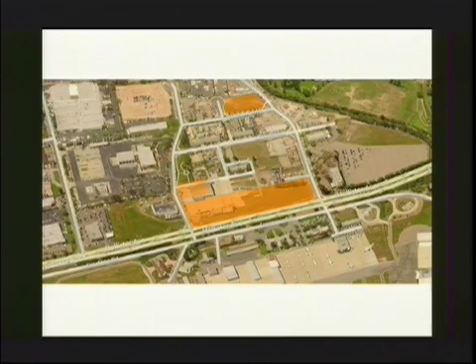We'll be showing both of these plans shortly, so we're going to start with parcel 22 down here. This is a site plan. Again, to reorient everyone, down below is Hollister Avenue, Love Place, Lopez Road, and this is the new proposed road, Wallace Becknell Road.

The study we're going to show you today is kind of the general balancing act between how do you develop a parcel where there are a couple of driving forces. One is how much can you build, how many buildings can there be—that's kind of a product of what support those buildings need in terms of parking, and in terms of water retention and water filtration, which is a serious issue. I think you'll see as we unveil this design that we've taken that issue very seriously and actually incorporated it to be really part of a feature of the design.

I just quickly wanted to call out some of the details of the project. We have a total of 21 units, two types of units. We have retail, light industrial, and we're totaling roughly under 50,000 square feet total. Retail is located on the left and the right side, and in between here is light industrial.

There are 4 key points we wanted to point out about the site plan. The first thing is that a majority of the parking is along Wallace Becknell Road, and this is mostly because of the airport guidelines, which say that parking has to be screened—we're just letting the buildings naturally screen that.

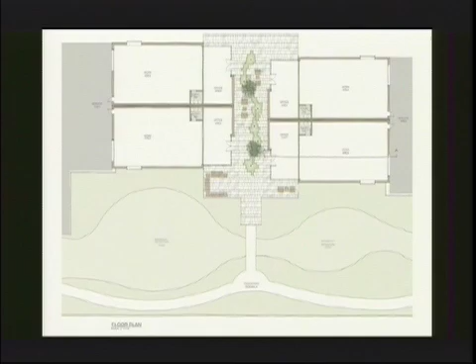This separation allows us to do a couple of different things in terms of how you organize all of the traffic that has to flow through the site. We also have the benefit of really querying people in the real estate community to decide what the matrix of spaces really should be, how big a space would a user want.

So we kind of came upon this 2,500 square foot module that started to work in terms of who our client base might be. But we also think that this is kind of a new development. I think the kind of tenancy that we'll attract will be a kind of higher techie type of tenant that might want to be in this space. And all of those users really want a certain sense of identity.

So to that end, this is our wedge-shaped buildings where we're doing all of this kind of water collection into a whole series of downspout gutters that will have drainage chains that come down into this kind of central area. So we've really kind of taken this idea of how water gets treated and made it a kind of feature of the building. So they not only serve their industrial purpose, but they serve a very environmental purpose as well.

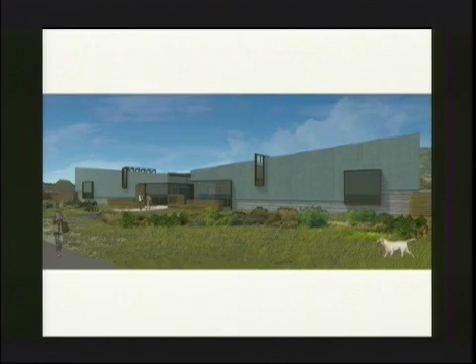And we think that on the Hollister Avenue face, this retention basin can be landscaped in a way that really makes these buildings face the community in a way that they'll be a very inviting and pleasant thing for people to come and enjoy. Not only work in, but enjoy.

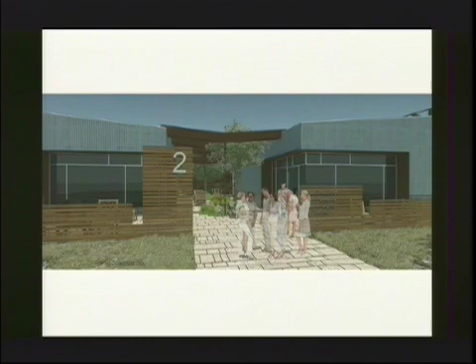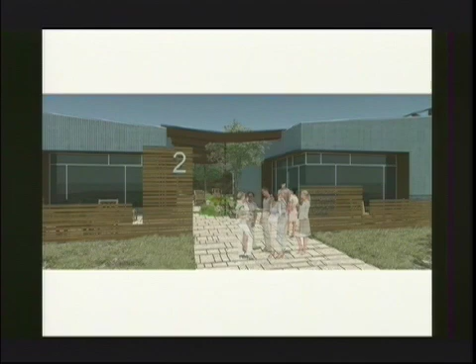So our courtyard, paseo courtyards, really give us the entrances to the low-end side of the buildings, which is really where the office components of those spaces might be. You can enter into the areas where offices would be located, and the passageway to come through gives the site some real transparency from one side to the other, and also makes for a very pleasant way for people to come in and out of the new buildings.

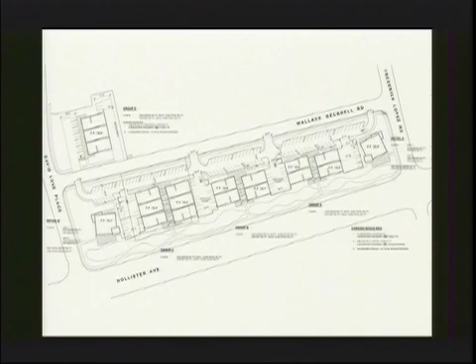They're also bookended. So although we have industrial uses here, there really is a visual importance to the corner points. So they're being bookended with a different type of unit that could potentially support some retail or commercial activity.

They really are the same building. We've done a little bit of carving away at the same kind of module that's being developed for the others. And that's kind of to reorient the corners back towards the intersection so that they have a little bit more importance visually as you drive up and down Hollister Avenue.

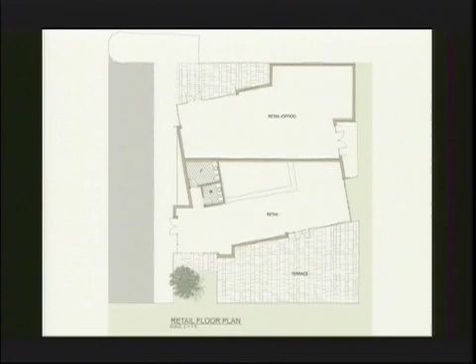So the retail components would just twist themselves away from the general buildings that would line the rest of the project. And,

But we also think that this activity is very worthwhile, especially in the campus community of buildings that are being developed here and the type of userships that kind of surround this entire property. So we think there's good justification for doing this. And it's a nice family of buildings as they relate one to another.

I just would point out, too, that in the specific plan, both those corners were set and identified for modest retail, not substantial retail by any means, but minor retail, service delivery type things. And it could either, if it doesn't go retail, it can certainly be commercial, industrial.

And all of the buildings are designed to either be 2,500 square foot units or linked together so that they can accommodate larger tenancies, should that be the case. And we like this. There's always a day and nighttime aspect to all buildings.

But we think that, along with direct relief, this campus of buildings could actually be a very pleasant addition to the family of buildings on Hollister Avenue. And I think that some of this issue of having these kind of transparent corridors that connect the Hollister Avenue side to the Wallace Avenue, Becknell, Wallace Becknell side, really make for a very pleasant way to organize this industrial campus.

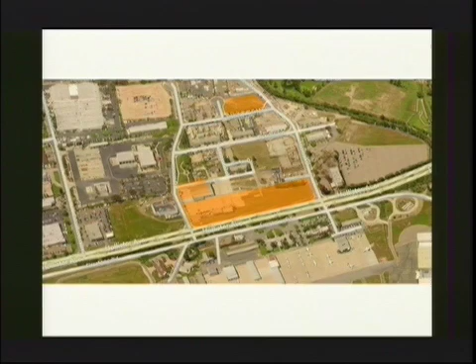And we're also doing a project linking in with this, using the kind of similar vocabulary for parcel 17, where there's already a kind of 6,000 square foot building program. We're kind of using the same elements, with the required amount of parking and a service courtyard, so there can be other kind of sales activities.

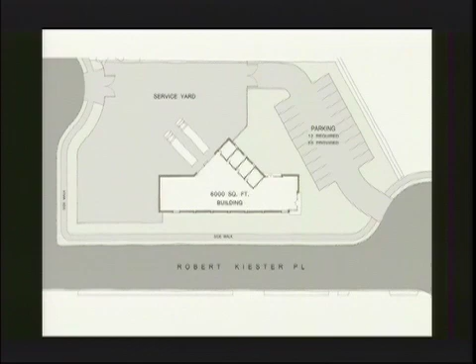There's been a variety of different user types that we've thought of, but ostensibly it's for storage and for truck access from one side and public access from the other. And we think that we'll probably be using the same kit of parts that we've established for parcel 22, so that there's an economy to the things that we're doing. We're really trying to replicate a kind of very simple kit of parts and make sure that if we keep repeating them over and over again, there's an economy of scale to the things that we're up to.

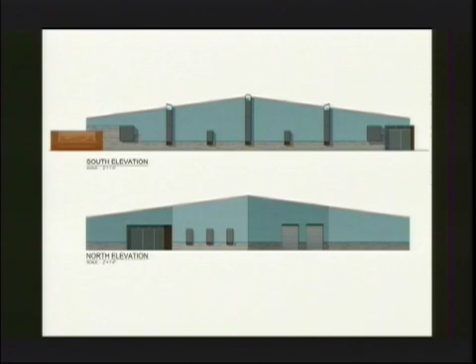I'd like to introduce Derek Eichelberger from Arcadia Studios, who's our landscape architect, who has taken control of our green space. Do we have the plan that has any of the photos on it?

Yeah, I have a couple of photos. You want me to go there? No, not just yet. I just want to make sure I have 2 pages. Yeah, please.

Hello, my name is Derek Eichelberger with Arcadia Studio, and we are doing the landscape on this project. It's fun to be involved in a project like this when from the very start all of the consultants are rowing in the same direction.

Bob and Jamie came up with what I thought was a really innovative, simple design that fits very simply on a very natural landscape. I thought it's very different than a lot of the landscapes you've seen in Goleta, and so I took my cues from that. They actually did the drawing you saw with a pastoral landscape, quasi-stream in front of the project, before I was even involved.

When I saw that, it harkened me back to a project I just finished not too long ago at UCSB, the Ocean Sciences Building, which was all about water retention and percolation on site. The landscape itself was designed to be exclusively Channel Islands plant materials, so it's all native.

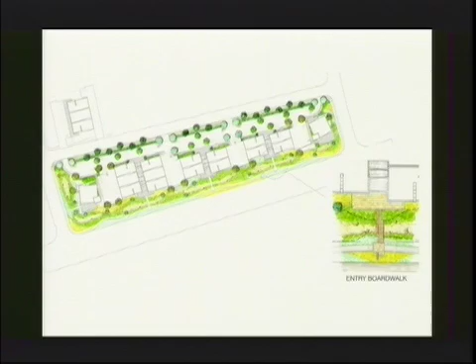We felt pretty lucky to piggyback on the UCSB project, because Derek's already done so much research on creating a native garden. These are all water tolerant species indigenous to Santa Barbara. It seemed like a no-brainer to intensify that sense of Santa Barbara in a water retention basin. We've done everything we can to take an ecological gesture and turn it into a real part of the architecture and the site. We're excited about this being a good neighbor on Hollister Avenue.

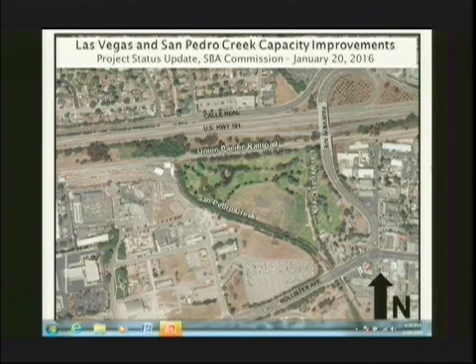So this is an overview. Let's see here, going down to the next slide. I presume it's a page down thing—no, here. Arrow. Okay, what did you do? That's okay. Use the tab. It's okay, we just got a preview. All right. Tab. Oh, this? Okay. Thank goodness for technical people—I'd never get through these otherwise.

Okay, so an overview of the project. Let me start by pointing out the picture in the upper left-hand corner—that's from 1998, I believe, which is when the gears started churning for the ideas of this project. Here we are in 2016, 18 years later, nearing completion. The project objective is to reduce flooding, mostly on the upstream side of Calle Real. There are residential neighborhoods and some commercial areas, and the highway itself, which historically suffered inundation often.

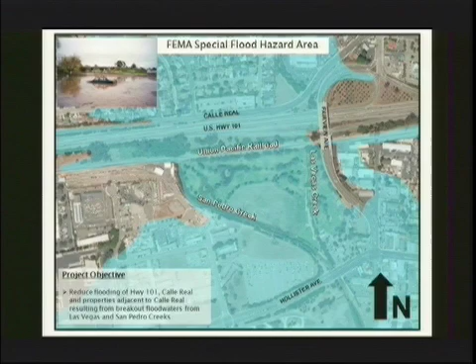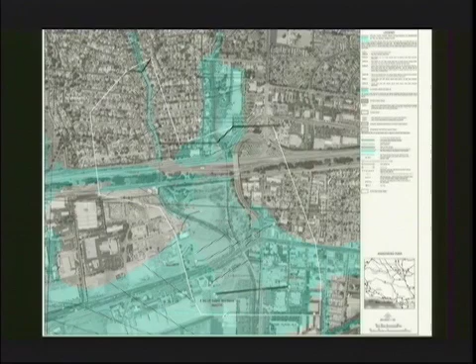The project was basically broken down into three elements, with Project A being what Caltrans did within their right-of-way—that's what was updated earlier in the meeting by Mr. Bennett. They funded the design and construction of what they're working on right now. That's basically two bridges that cross the highway, significantly increasing the conveyance capacity of Las Vegas Creek and San Pedro Creek. Project B is immediately downstream of the highway at the railroad—those bridges were also undersized, so Project B was a significant upgrade of those bridges. Project C is basically everything upstream and downstream of the Caltrans and Union Pacific right-of-ways.

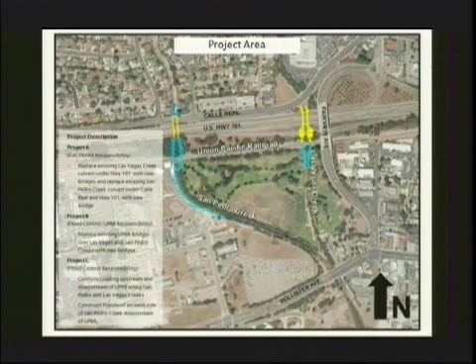I'll point out the green area—that's Twin Lakes Golf Course, just for identification purposes, and you can see Lot 2, our parking lot, right off of Hollister, to give you an idea of the location. Thank you for pointing that out. Please interrupt me with questions if you have any, otherwise I'll just keep going.

Overall schedule, as reported earlier, we're nearing the end here. The Union Pacific Railroad bridges are in—they were constructed in the summertime. Caltrans is nearing completion and will be finished. The information we had was May, but they've got a lot of minor stuff that really won't affect the traveling public as much as the traffic detours have for the past 12 to 18 months.

Project C, which I described as the conform grading and the flood wall, our contractor is at the tail end of that project as well. The major remaining element is what we're calling the transition structure, which will be built next summer. We had to wait for Caltrans to complete their work on San Pedro Creek at Calle Real, and then we'll go in and complete the transition of the newly constructed San Pedro Creek channel to the existing channel upstream at Calle Real. That's the transition structure project—it'll be completed before next winter. When that happens, the entirety of the project will be completed. John, you might tell them how big the retaining wall is, or the flood wall.

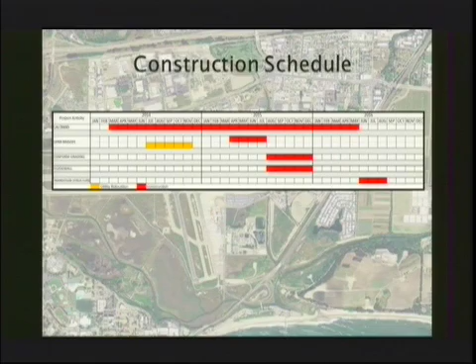One of the mitigation measures that became a fairly major part of this project, I do have pictures of it. In fact, before I get to those pictures, let me stop on this slide for a moment.

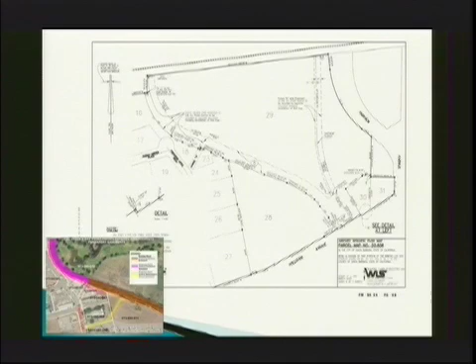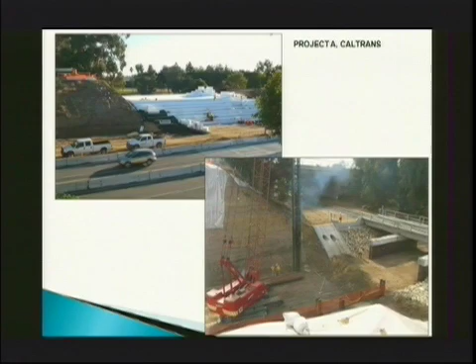In the lower right-hand corner is a picture of Las Vegas Creek, standing near that upper picture, looking at the Union Pacific Bridge on the right-hand side. So anyway, all the agencies involved in this multi-jurisdictional project—without the cooperation and participation of any one of those agencies, this project wouldn't have gone forward. So that's why we're very appreciative.

It was quite an operation to watch too, I might add. They come in and knock those bridges out basically in a heartbeat.

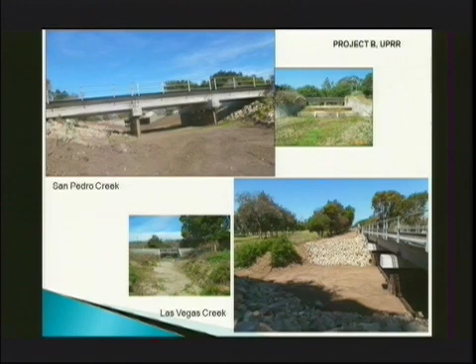...the creeks were able to maintain more of the flow that was within their watershed. One of the problems pre-project was that the culverts were so small that the drainage in San Pedro Creek would back up upstream at Calle Real and work its way over to Las Vegas Creek. That's why there was that big ponding in the first picture I showed, back in 1998. So anyway, when the bridges were upgraded to improve conveyance capacity, San Pedro maintained more of its own flow.

So to mitigate that and stay in conformance with FEMA, the flood wall is required to make sure that we did not solve a problem upstream of Calle Real but then cause a problem downstream of the railroad bridges. That's pretty much a guiding fundamental approach for us. So that was the reason for the flood wall.

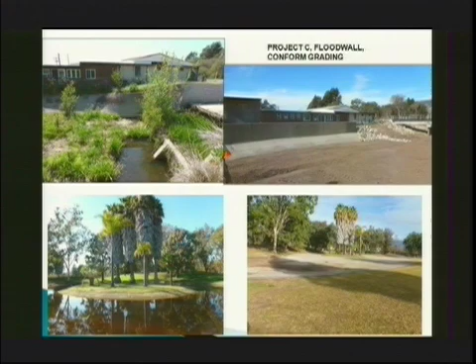Is there only one lake at the golf course now? There's no lakes anymore, there's two waste areas. Are they going to rename it to sand trap? I don't know if they're going to rename it or not. Maybe 'Waste Golf Course.'

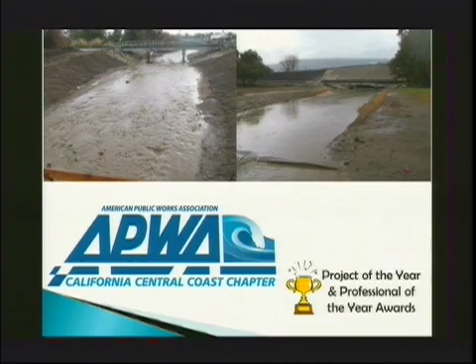We got really good feedback from Mr. Lee, the golf course operator. He was very pleased with how this behaved. I was personally a little surprised so much water was flowing, but there was one heck of a thunderstorm band that came through, and it really dumped there for about half an hour that morning.

The graphics on the bottom of this slide show that this project actually just won. The awards ceremony is tonight up in the Santa Maria area, a local chapter of the American Public Works Association Project of the Year Award. We're pretty happy, and again, these projects don't get done without everybody involved. There's just no way. Years and years of coordination and a lot of good people involved. So that's it, thank you very much.

That's a great question, let me explain even though I probably won't get back to that slide. The golf course is kind of what I refer to as ground zero. Upstream of the golf course, the hydraulic conditions are pretty much dictated by what's going on upstream. Downstream of the golf course, the hydraulic conditions, how bad it floods, are pretty much dictated by downstream conditions, the tide, the slough.